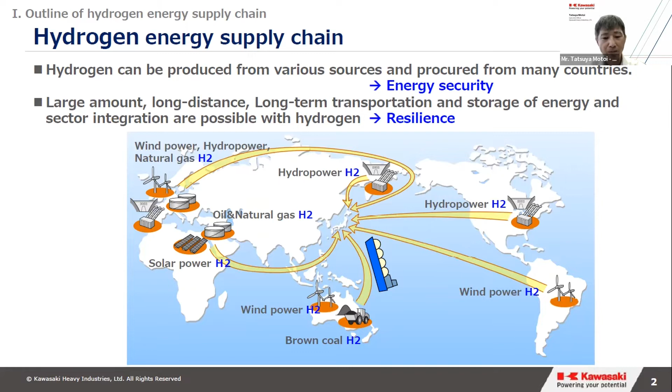This slide shows a summary of the international hydrogen supply chain that Kawasaki is aiming for. The hydrogen energy supply chain consists of production, transport, storage, and utilization. Renewable energy would be the most prospective resource for hydrogen production. Until the hydrogen supply foundation is ready, we utilize abundant fossil fuel like brown coal in Australia and CO2 capture and storage technology to produce hydrogen. The LH2 carrier is one of the key factors to implement the mass transportation of hydrogen.

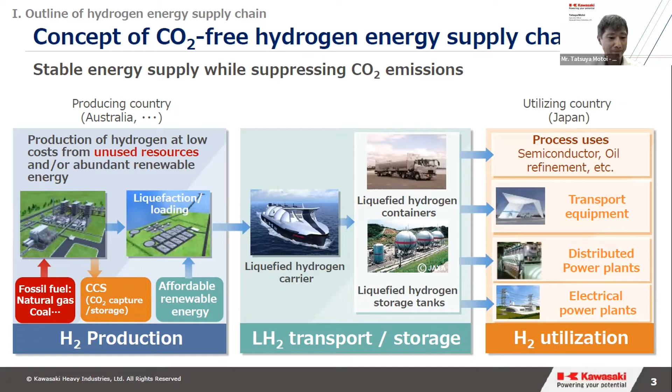The purpose of the pilot project is to demonstrate hydrogen production at Latrobe Valley in Australia, liquefaction and storage at Hastings Port, marine transportation from Australia to Japan, and unloading at Kobe Terminal in Japan. The pilot project is divided in two portions and is being promoted by two organizations, HySTRA and HEA, respectively.

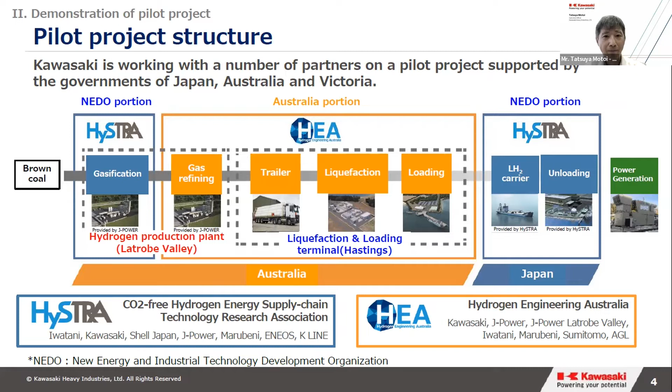This is the world's first LH2 carrier that we at Kawasaki built in Kobe Shipyard and delivered in 2021. The vessel is named Suiso Frontier. This vessel is equipped with a vacuum-insulated cargo tank of 1,250 cubic meters. The cargo piping system is also vacuum insulated to minimize heat ingress during loading and unloading.

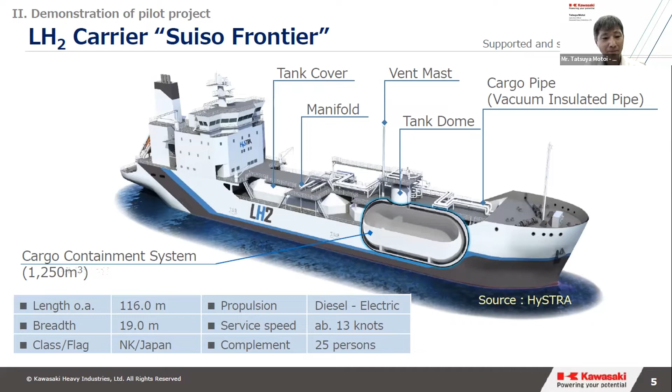The temperature of liquefied hydrogen is -253 degrees Celsius. Therefore, an extremely high level of insulation system is required. A vacuum insulated double shell structure is applied for the cargo containment system. This cargo tank is designed to accumulate boil-off gas during the voyage under fully loaded condition. Regarding the material, the inner vessel is made of stainless steel, and the saddle support of the inner vessel is made of GFRP, which has excellent thermal insulation properties and strength.

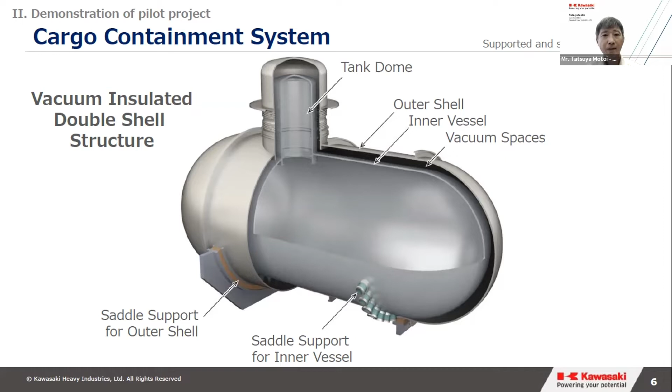After the completion of the LH2 carrier and LH2 terminal, the demonstration was conducted in 2 phases. In the first phase, the tests for loading and unloading operation were carried out. In these tests, performance of cargo equipment was also verified, practically using liquefied hydrogen. Following these tests, the demonstration of a full load trial voyage in Japanese coastal waters was conducted in October 2021.

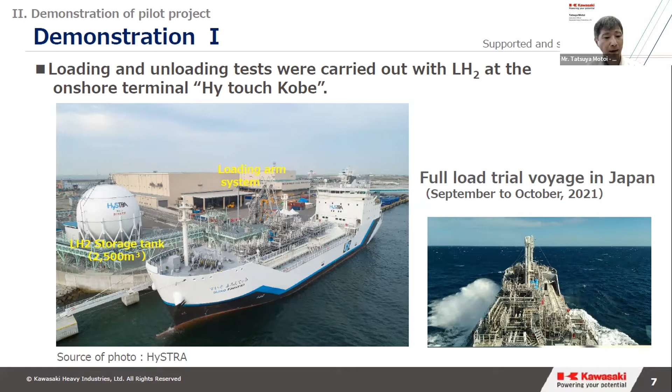In the second phase of demonstration, long-haul transportation with 9,000 kilometers distance between Hastings, Australia, and Kobe, Japan was conducted. Through a series of these demonstration tests, all aspects, including safety and technology used in long-haul transportation and cargo handling, were successfully verified.

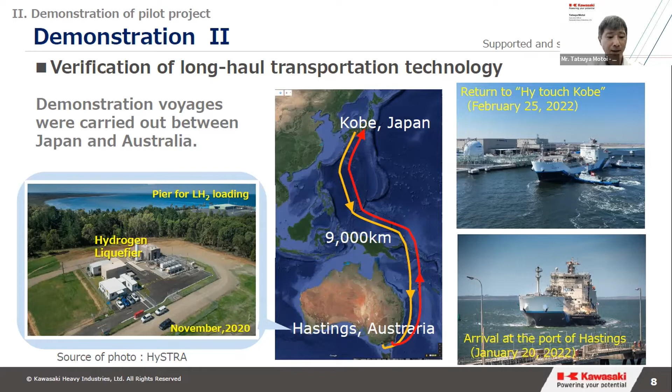The last part of this presentation is our actions for commercialization. This slide shows recent hydrogen business projects under consideration and investigation in the world. As hydrogen can be produced from various resources and can be transported in large amounts with lower cost, many companies in the world are promoting feasibility studies on hydrogen businesses. We, Kawasaki, aim to contribute to early achievement of decarbonization through this project as their partner.

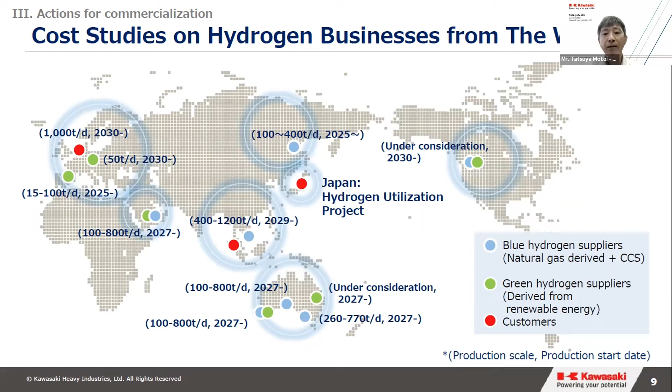As you can see, Kawasaki has achieved important milestones and is steadily moving toward the deployment of a full hydrogen supply chain from production to utilization. The next major step is commercialization. With the aim of achieving full-scale commercialization in the 2030s, we started development of scaling up technology from 2019 and will start a commercial scale demonstration in the mid-2020s. Our partners are also developing other essential equipment for a large-scale supply chain.

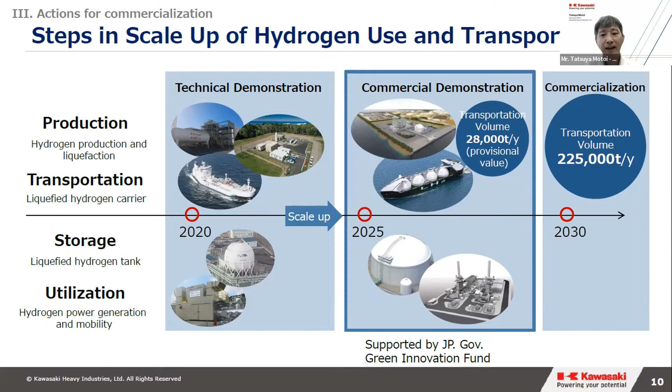This is a graphic image of the large-scale LH2 carrier under development. This vessel can transport about 160,000 cubic meters of LH2. 4 cargo tanks of 40,000 cubic meters are to be installed. The propulsion system is designed to effectively utilize boil-off gas as fuel, thus contributing to reduce the CO2 emission from transportation.

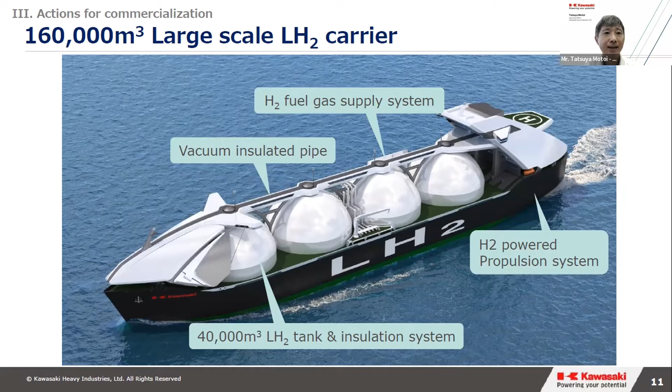This April, Kawasaki obtained approval in principle from ClassNK for its cargo containment system, cargo handling system, and hydrogen fuel propulsion system. The AIP was issued by ClassNK following examination to confirm that the vessel satisfied the IGC code, the IMO interim recommendations, and ClassNK's regulations and guidelines.

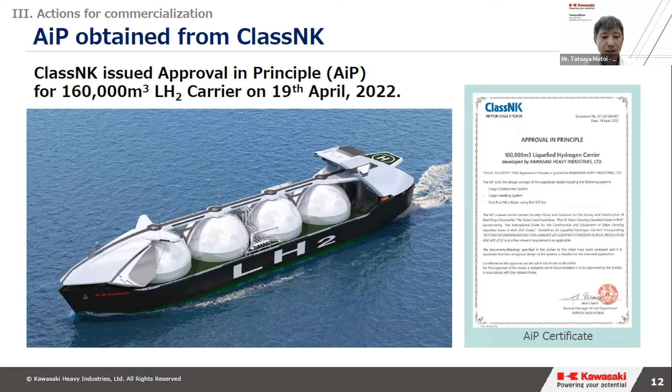In conclusion, I'd like to emphasize the importance of the CO2-free hydrogen supply chain for accomplishing decarbonization. Hydrogen from fossil resources such as natural gas, coal, and so on, linked with CO2 capture and storage technology, will realize a vast energy supply chain. This contributes to stable energy supply and security. Hydrogen utilization emits no CO2. Thus, hydrogen is expected to play an essential role in decarbonization. Wide use of hydrogen brings industrial and economic growth.

Lastly, hydrogen production started from fossil fuel will be shifted to renewable energies in the future. We believe that this will achieve a sustainable energy society. This concludes my presentation. Thank you very much for your kind attention.

Thank you for sharing a quite interesting topic, Mr. Motoi. Do the panelists have any question about this topic? How about Mr. Matsunaga? Yes. Thank you very much, Motoi-san, about your challenge. We are very happy to hear that the first technical demonstration was carried out successfully, and now it is the stage of scale up. Our question is, what will be a challenge for scale up of the liquid hydrogen project?

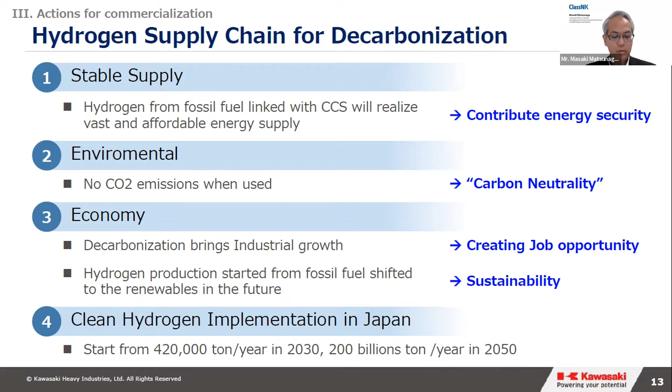Then I'd like to move to the second topic. Mr. Akamatsu, I think your company is playing an important role in the ammonia supply chain. I would like you to share your project with us. Mr. Akamatsu, please. Okay, thank you very much.

Can you see the screen? Oops. Yes. It's okay? Okay, yes. Okay, so thank you very much again.

So we, Itochu Corporation, are one of the trading houses in Japan. We are not a shipyard and we are not a shipping company. But with an approach from a trading company's point of view, we try to contribute to zero emission shipping nowadays with ammonia fuel.

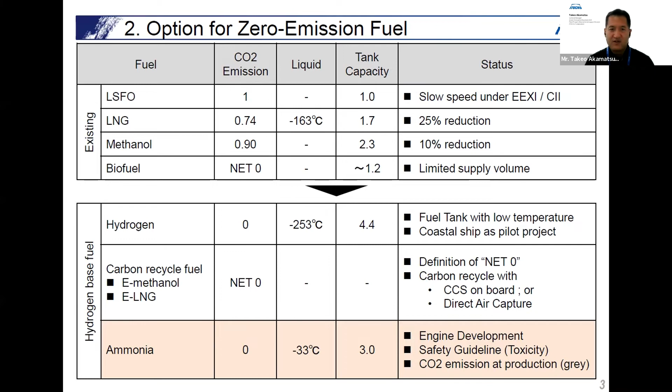But from the view of a trading house, we are not a technical provider. So maybe we should wait for a hydrogen engine project when it is ready. Then we are now focusing on ammonia because simply the technology is almost ready. So now is the time to make a business development with a trading company like us.

And if we say the current status of ammonia vessel, first we have two issues: engine development and safety guideline. So engine development, of course, various manufacturers are working for development of ammonia engine. But as far as we understand, for example, MAN Energy Solutions will carry out engine test from second half of this year. So if the result of engine test is positive, then we assume engine will be ready.

And the safety guideline, we have two guidelines. One is for ammonia fuel vessel, and the second is for bunkering. So first guideline for ammonia fuel vessel, I think ClassNK and other classification societies already issued the guideline. And now IMO, they have a discussion about the international guideline. So I believe that is a matter of time.

But at the same time, we need to have a guideline for ammonia bunkering, which should be determined by local port authorities in each country. Later on, we will explain about our strategy, but we focus on Singapore as a pilot case. And the Maritime and Port Authority of Singapore is now developing a bunkering guideline. So I think that will also be a matter of time, and maybe sometime end of this year or early next year it seems to be ready.

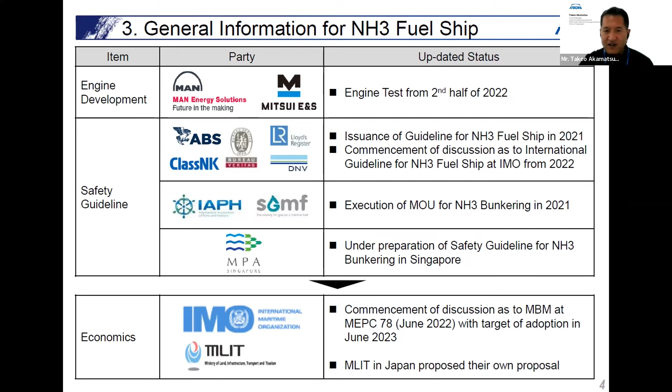And then if engine and safety guideline is ready, then next question is economics. Of course, now we do understand that the IMO has a discussion about the MBM, and the Japanese government proposed their own ideas. And we are very much focusing on what would be the discussions at the IMO.

And so, because technically it's almost ready, we as a trading company try to develop the business side. So we intend to develop all categories at the same time, a so-called integrated project. Because always, if we talk about alternative fuel, we have a story of a chicken or egg. To avoid a chicken or egg story, we intend to develop together with the partners in the

various categories. So on the shipbuilding side, we are working with Nihon Shipyard, Mitsui, ClassNK to develop the vessel with ammonia engine, which should be owned by Itochu and the shipping company partners and chartered to end user. But in order for us to encourage end user to take it, we have to prepare the bunkering.

So we focus on Singapore as a pilot case and are working with the parties here, like Pavilion, TotalEnergies, MOL, Vopak. And also production side, if we introduce ammonia as a marine fuel, we need to have new production. So we have to develop with a potential partner to produce ammonia for marine use. So our idea is to develop 4 categories at the same time together.

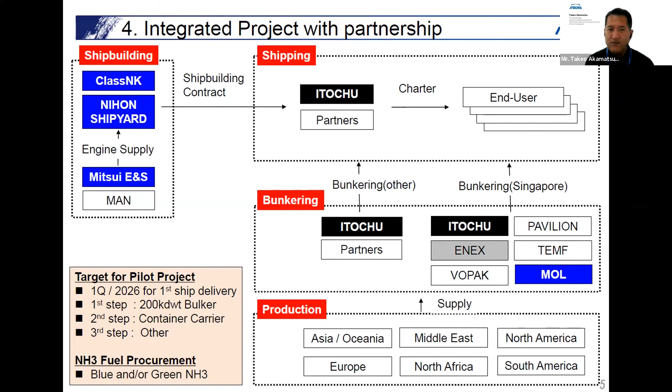And if we talk about the global network of ammonia bunkering, as we pointed out, we focus on Singapore as a pilot case. But if we try to expand various vessel types, we have to prepare a global network. So we try to establish bunkering stations in Europe, the Middle East, Japan, South Africa, Panama, or many other places, maybe with partners. So that is our idea.

And for this pilot project, we obtained support from the Green Innovation Fund from the Japanese government. Based on this support, we are now trying to develop the first project together with partners: Nihon Shipyard, Mitsui E&S, and on the shipping side, Kawasaki Kisen, K Line, and NS United. So we are now in the process of commercializing the first vessel together.

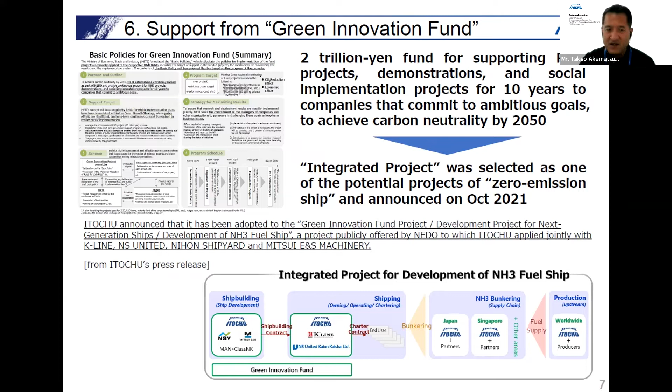And coming back to the bunkering side, in Singapore we are working with partners. Early this year, we obtained AIP together with Singapore shipyard Sembcorp. We now understand what the issues will be for ammonia bunkering in Singapore, and intend to discuss those pending issues with the port authorities.

So to accelerate our discussion in Singapore, our consortium of six parties executed an MOU with the Singapore MPA last April, at the time of Singapore Maritime Week, to discuss ammonia bunkering in Singapore further.

At the same time, at Itochu, we are trying to develop joint study frameworks in the market, especially for shippers, because for many shippers it is a challenge to use ammonia as a fuel. So they requested us to prepare a kind of joint learning structure. So we organized the first joint study framework, mainly with shippers and classification societies, including ClassNK.

And we carried out around 30 sessions to talk about common issues: safety for ammonia fuel vessels and bunkering, ammonia fuel specification, and net CO2 emissions of ammonia production. But then we realized that in order to discuss safety for ammonia bunkering, we need to involve port authorities. So early this year, we decided to establish a second joint study framework, mainly with port authorities.

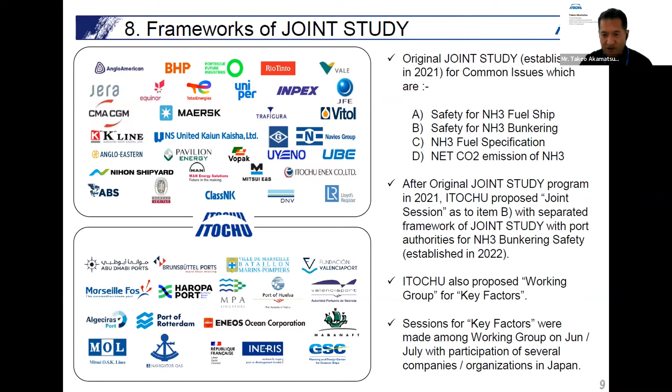And coming back to our pilot project, we intend to deliver the first vessel in the first quarter of 2026. So we need to achieve FID sometime early next year, which is very challenging because we still have to wait for the engine test. But that is our target, and we are working with various partners to achieve it, not only for the ammonia fuel vessel but also on the bunkering side.

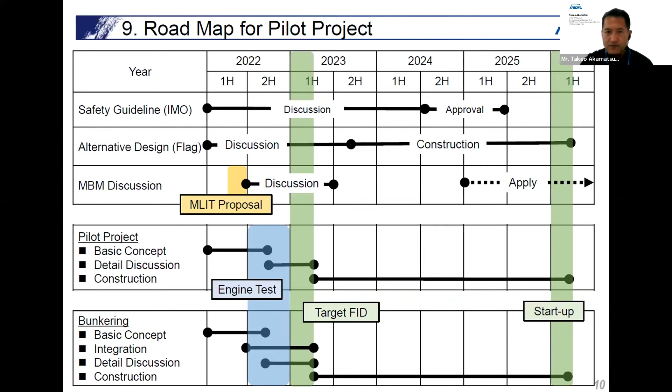And the challenges from now are, we have to say, technical and commercial. On the technical side, design development should be done by the shipyard, but of course in parallel with the establishment of international guidelines and bunkering guidelines at the local port. Therefore, how we can make an interface among rules, guidelines, and ship designs together is one of the challenges.

On the commercial side, besides price, we have to consider what kind of trading system we establish for ammonia fuel, especially the scope of CO2 emissions. Nowadays people are talking about life cycle assessment, how we should evaluate it, how we should get the certificate, and how we should trade it. So that is maybe the challenge.

And also the price mechanism. We don't have any ammonia fuel price today. There is only the price of ammonia for the fertilizer business. So how do we consider a price index for ammonia fuel, and how should we evaluate the CO2 premium for blue or green ammonia if our price index is based on gray ammonia?

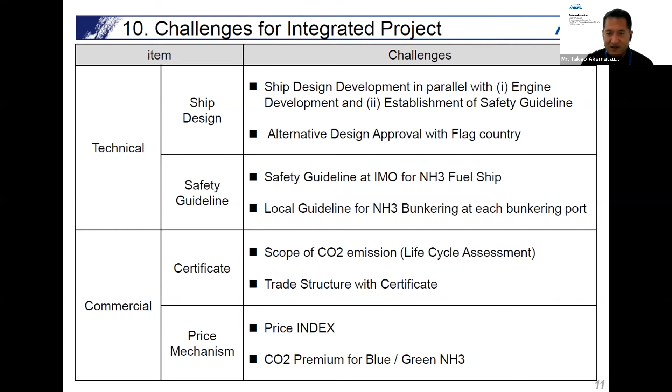Those issues we have to discuss with various stakeholders: shippers, ship owners, bunkering suppliers, producers, many of them. So how we can build this kind of supply chain, I think, is also the next challenge. So that is all from my side. Thank you very much.

Thank you for your explanation. This is very interesting information. So, Mr. Motoi, do you have any question for him? Well, thank you, Akamatsu, for your kind presentation. I think ammonia is one of the alternatives for future energy, as well as hydrogen. So my question is about the supply chain for ammonia as a marine fuel. What about the future prospects for expanding ammonia utilization?

Okay, thank you very much. So I think we have to consider the vessel shipping route, the bunkering position, and the production side. What would be the most suitable supply chain for each?

Therefore, if we talk about Singapore bunkering for some shipping route, then of course we have to find the proper production nearby, like from somewhere in the Far East, countries like Malaysia, Indonesia, or Australia, or maybe the Middle East. If we prepare the bunkering station in Europe, then maybe we have to prepare a supply chain from somewhere in Europe or the Middle East or maybe Africa.

Therefore, depending upon the shipping route and cargoes, we decide where the proper location of the bunkering site is. Then we have to find what is the best ammonia for this bunkering. So it's very complicated, but we should start somewhere. Thank you. And the situation is the same as hydrogen. Yeah, we agree. Thank you.

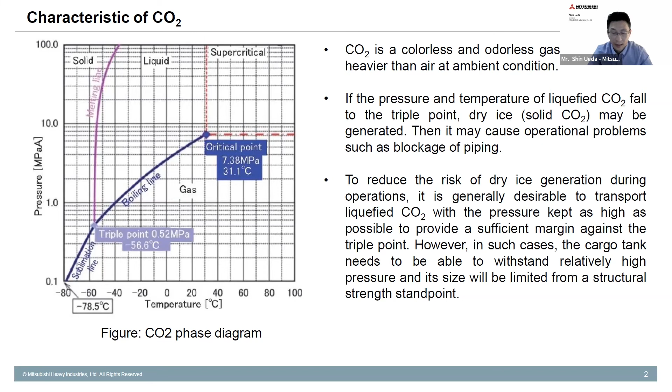However, in such cases, the cargo tank needs to be able to withstand a relatively high pressure, and its size will be limited from a structural strength standpoint. In order to keep the CO2 in a low temperature and high pressure state, a suitable cargo containment system is applied. The Type C tank is generally adopted for cargo tanks of small liquefied gas carriers and is well proven. However, in the case of liquid CO2, appropriate consideration of the greater specific gravity is required, which is about double that of LPG.

Mitsubishi Shipbuilding ensures the reliability of the cargo containment system by conducting detailed numerical simulation using FEM and CFD calculation. We conducted comprehensive technical verifications, and our cargo containment system for the liquefied CO2 carrier has obtained AIP from Bureau Veritas.

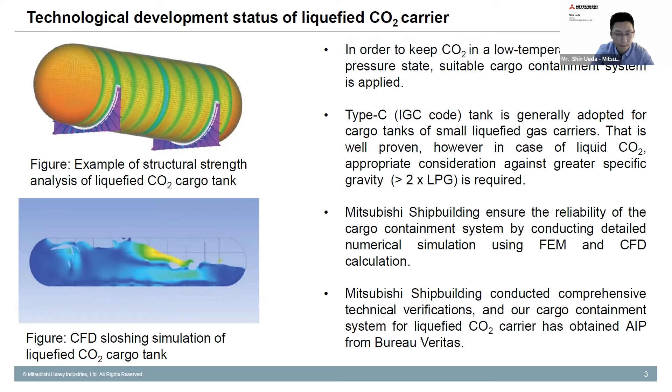Here are the initiatives of the liquefied CO2 transportation demonstration ship project. We have signed a contract with Sanyu Kisen for a demonstration ship for liquefied CO2 transportation, which will be used in research and development of carbon capture, usage and storage technology in Tomakomai by NEDO. The demonstration ship will be delivered in the second half of fiscal 2023, prior to the liquefied CO2 carrier built for the Norwegian Northern Lights project, so it is expected to be the world's first liquefied CO2 carrier for CCUS.

Mitsubishi Shipbuilding is responsible for the entire design and construction of the demonstration ship, including the cargo tank system installed thereon, utilizing our knowledge cultivated so far through sufficient experience in the construction of liquefied gas carriers.

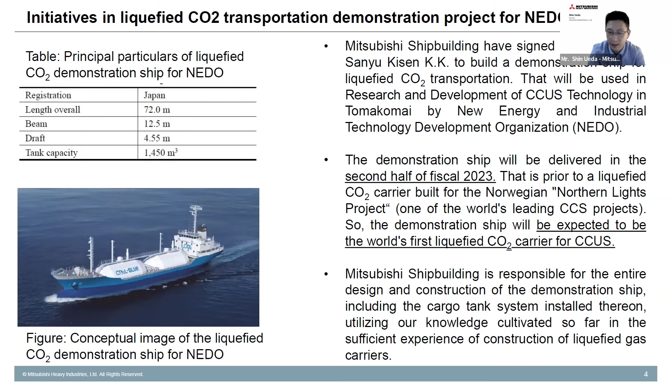And next slide is a CO2 capture system. We, Mitsubishi Shipbuilding, as an MHI group company, aim at building the CO2 ecosystem. We are also working on the development of an onboard CO2 capture system. In this project, CC Ocean, which was jointly implemented with K-Line, ClassNK and Mitsubishi Shipbuilding, we conducted a demonstration test of a small-scale CO2 capture plant on board under the commercial operating conditions of the ship.

This was the first time in the world. The project was conducted over 2 years. A HAZID evaluation of the plant and a safety evaluation of the system were conducted. And the demonstration plant was fabricated, installed on the coal carrier, and operated in the offshore environment for approximately 6 months for measurement and checking the performance.

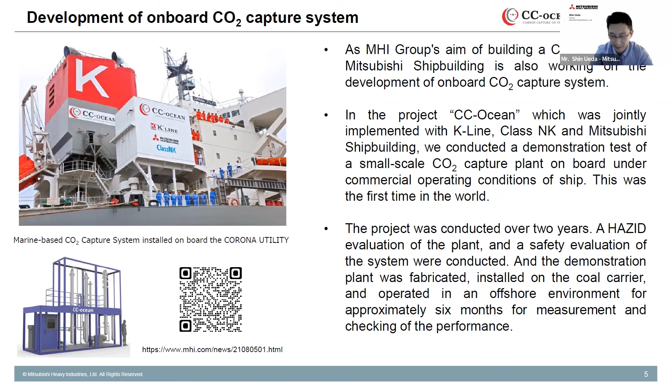And here I would like to move on to ammonia as fuel. In recent years, increasing the sense of crisis over the global environment and climate change, it has been required to take countermeasures for GHG reduction and carbon neutrality. LNG fuel has already been recognized as a bridging solution before carbon neutral fuels. However, it is not so simple. The conditions and backgrounds for the energy supply are different by ship type and operation pattern. And it is expected that ship fuels in a variety of segments will not be the same and will coexist in the future.

As shown in the table on the left, differently from other candidate fuels, ammonia does not emit CO2, and it has suitable characteristics for mass transportation and long-term navigation. Therefore, ammonia is recognized as a promising option.

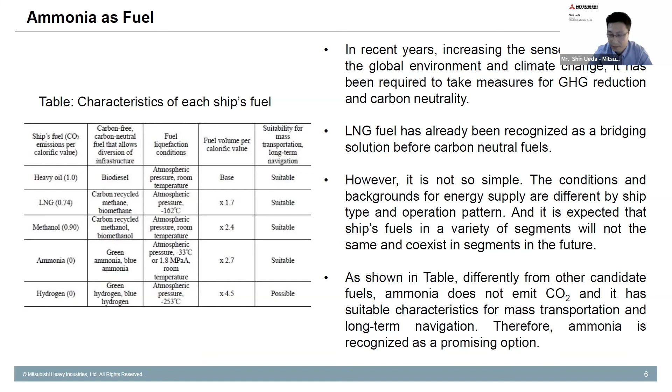And here are our activities for ammonia. The Public-Private Fuel Ammonia Production Council under the Ministry of Economy, Trade and Industry of Japan has set the target of achieving an annual ammonia transportation volume to Japan of about 3 million tons by 2030 and about 30 million tons by 2050.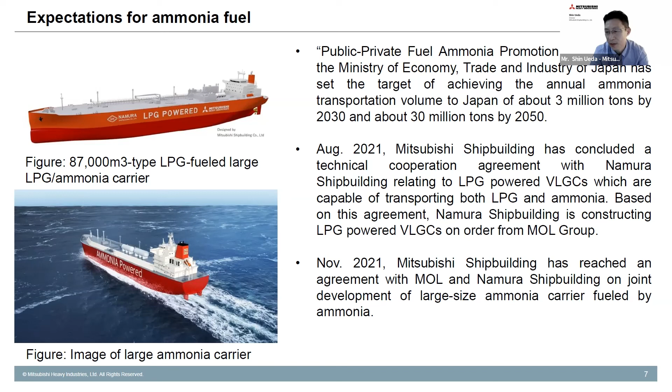Then we have concluded a technical cooperation agreement with Namura Shipbuilding relating to LPG-powered VLGCs, which are capable of transporting both LPG and ammonia. Based on this agreement, Namura Shipbuilding is constructing the LPG-powered VLGCs on order from the MOL group. And Mitsubishi Shipbuilding has reached another agreement with MOL and Namura Shipbuilding on joint development of a large-sized ammonia carrier fueled by ammonia.

Preparing for the expansion of general use of ammonia as marine fuel, it is also necessary to quickly set up the ammonia-related rules and training for able crews. LNG and ammonia are both gas fuels. So building ammonia-fueled ships, equipment and crew skills on the same basis as LNG is a better way forward to ammonia fuel.

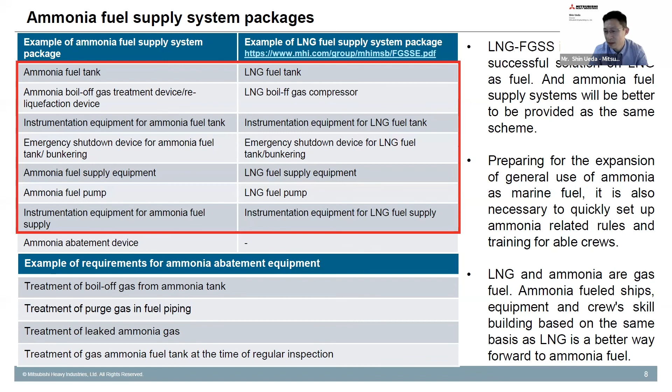Yeah, one of our prime concerns is when the use of carbon neutral fuel will reach a large-scale stage. It is difficult to forecast the timing because there are various elements to be considered. Therefore, to secure flexibility of selection in ship operation, ammonia-fuel-ready LNG-fueled ships have emerged as a new option.

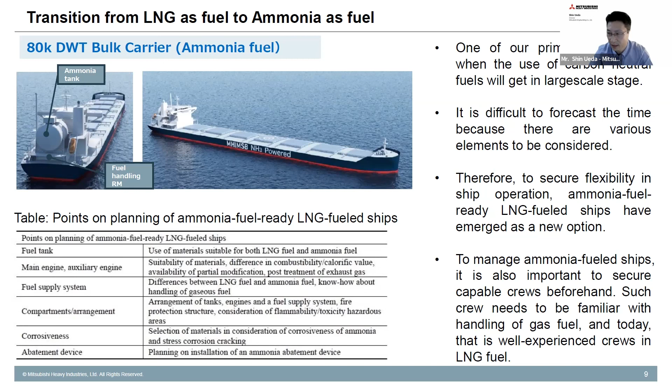To manage ammonia-fueled ships, it is also important to secure capable crews beforehand. Such crews need to be familiar with handling gas fuel. And today there are well-experienced crews in LNG fuel, so we think that from LNG as fuel to ammonia as fuel is a straight line.